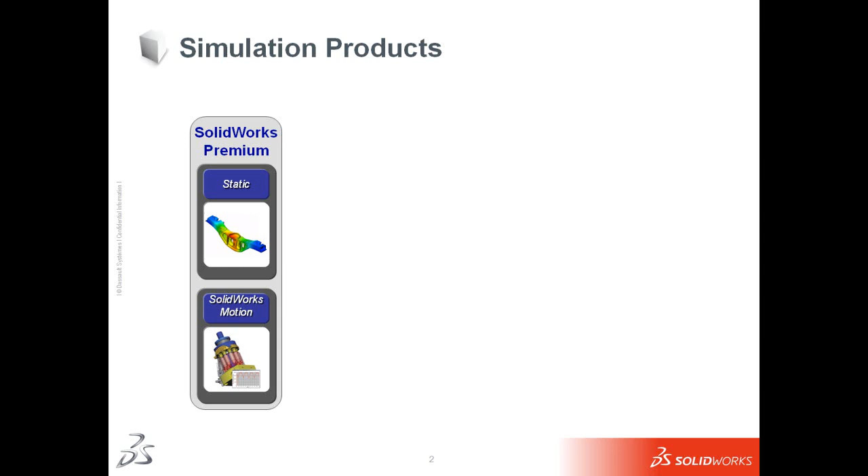If we take a look at what SOLIDWORKS Premium holds, basically it has the whole SOLIDWORKS lineup, including SOLIDWORKS Professional, which includes Toolbox and PDMWorks, and all the other SOLIDWORKS add-ins. But SOLIDWORKS Premium has something special: it has static analysis and SOLIDWORKS Motion, so two simulation packages.

When we move up a level, we get into Simulation Professional, and Simulation Professional offers a much wider variety of analyses that you can do. Everything from frequency, optimization, drop test, fatigue, and thermal and pressure vessel studies. So we'll get into some of those demos in a minute.

The highest level of simulation that we offer is Simulation Premium. That includes everything in SOLIDWORKS Premium, static analysis, etc., everything in Professional, as well as nonlinear studies, composites, and advanced dynamics. Today, because we are on a time schedule, we're only going to be covering these topics: static analysis, frequency, fatigue, thermal, drop test, and a quick nonlinear study.

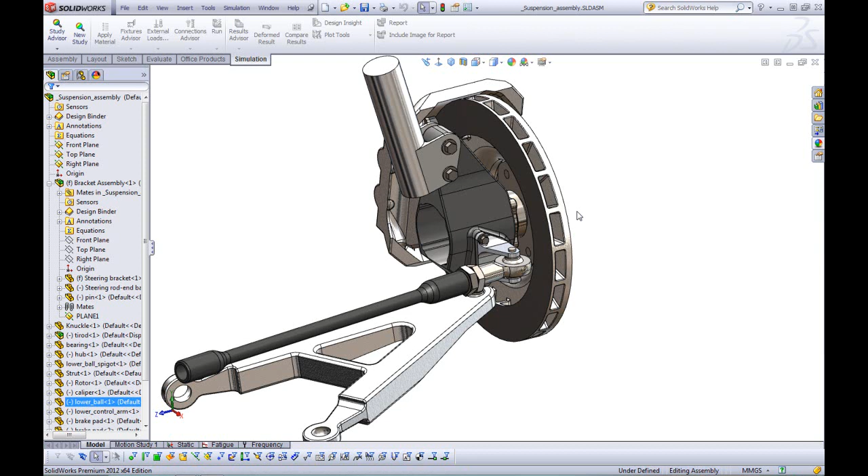So let's get started with the demonstration. I'm going to hop over to SOLIDWORKS here, and we have a suspension assembly for a rally car here. And what we're going to focus on is going to be this bracket right here, this steering bracket.

We want this to sustain. Actually, let me hop back over to the PowerPoint and talk about our goals for this study. So we're going to do a design validation for this bracket. We want to make sure we keep the stress below 150 megapascals.

We're going to design it, and we're going to do a fatigue study on it, so we want to make sure that it lasts an entire season of about 10 to 20 rallies. We're going to load it and unload it 1 million times using a fatigue study again. And we're also going to do a frequency study because we want to avoid frequencies in the range of 1 to 30 hertz, because typically the wheel motion generates about 27 or 30 hertz, so we want to make sure we stay out of that frequency range so that we don't hit any resonance.

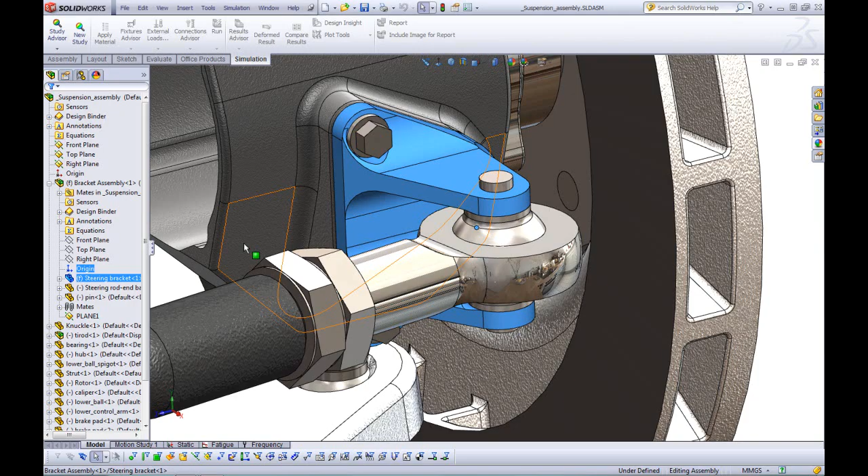Okay, so we'll jump back into SOLIDWORKS, and using configurations here, I basically just turned off all the rest of the components so we can focus just on this component. So let's go ahead and start a new study.

If you have Simulation Professional, you will see all these study types. Depending on what package of simulation you have, it's going to give you a different amount of icons here. If you have only SOLIDWORKS Premium, you will only see static here. To turn on simulation, before I get ahead of myself, you just go to Tools, Add-ins, and make sure that SOLIDWORKS Simulation is turned on. SOLIDWORKS Motion is a separate add-in, and that is included with SOLIDWORKS Premium, remember.

Alright, so let's go ahead and start a new study, and we're going to create a static study and say OK. For those of you unfamiliar with how to set up simulation analyses, we do have other webinars on our website, as well as the tutorials in SOLIDWORKS to go through and teach you how to set up analyses.

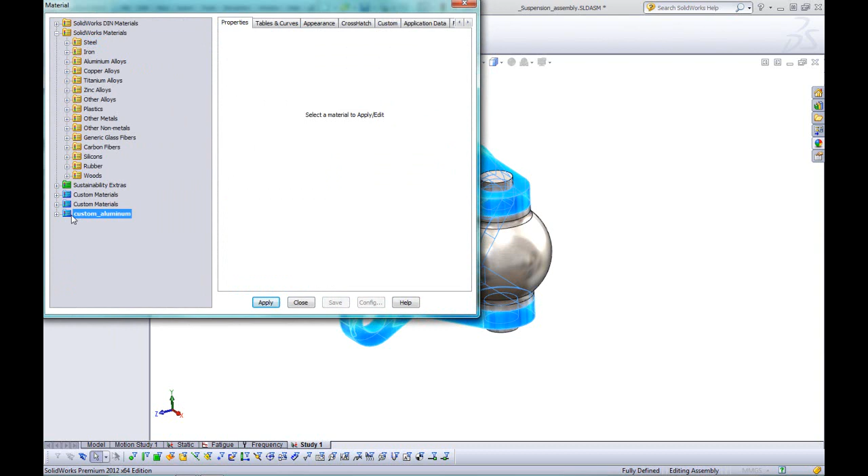So really quick here, I'm just going to add a material to this bracket, and it's going to end up being a custom aluminum material. Remember, the SOLIDWORKS and simulation material databases are fully customizable, so you can go in there and create your own materials.

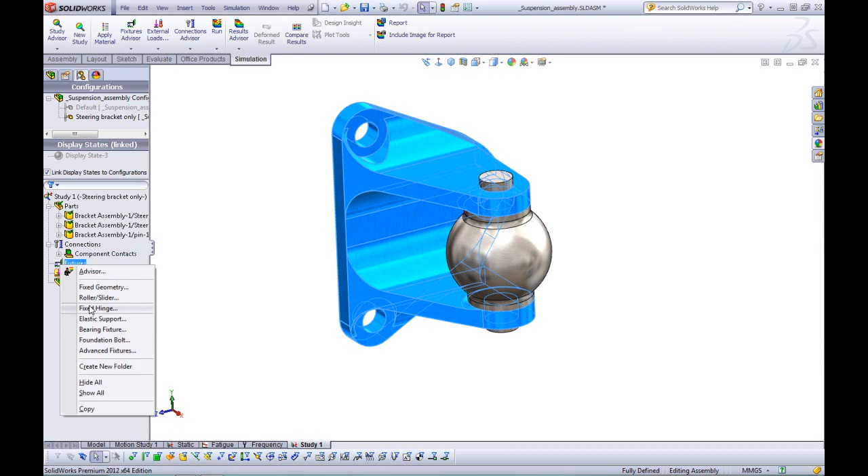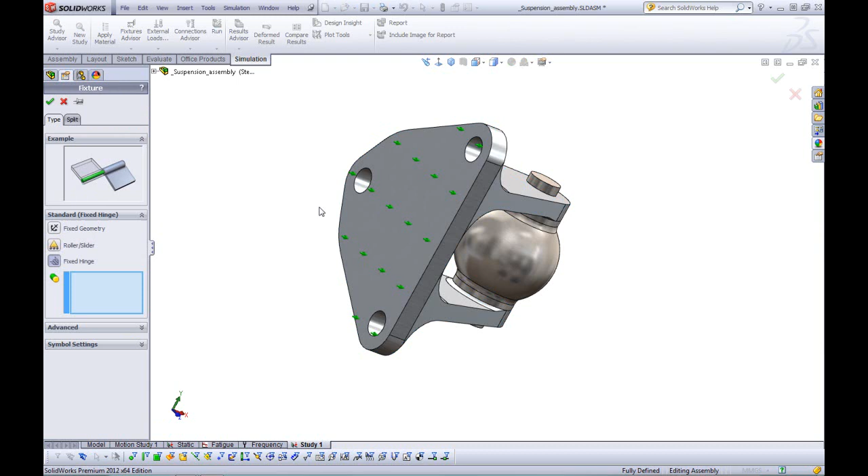For fixtures, we're going to go ahead and do a roller slider on this back face. So basically what it allows this back face to do is move parallel to this face, because in reality it's not welded to the plate that it's on. It just slides there, and it's only connected with the bolts. My next fixture that I'm going to do is called a fixed hinge, which basically simulates the bolts in these three holes. Okay, that's it for fixtures that I'm going to do.

The next thing that I'm going to do is I'm going to add a load, a force load, onto this face. I don't want it to be normal, so I'm going to click selected direction, and I'm actually going to pick this face for my direction, and I'm going to add 6,000 newtons in this direction.

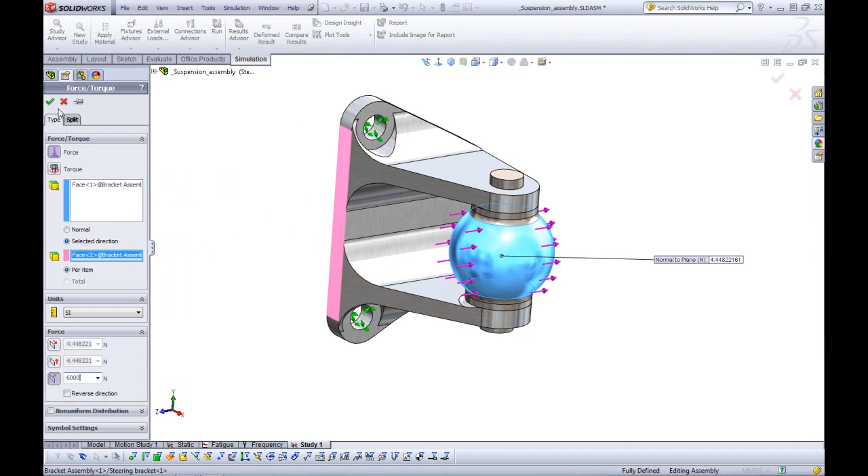And that's pretty much it for the setup. We can go ahead and run this static analysis, and again, the static analysis is included in SOLIDWORKS Premium, and we can see here the reaction of our bracket with that force.

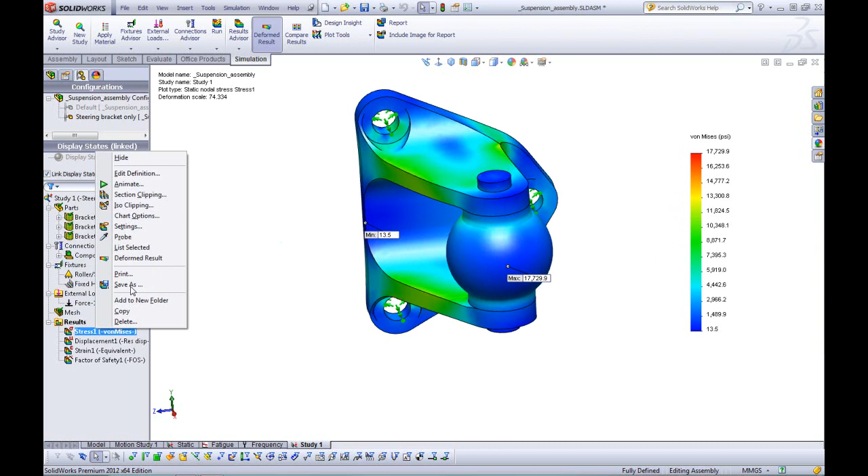I'm just going to hide this force so it stays out of our way, and I can animate any plot that I have very easily, so I can see what it's doing, and it is behaving as expected, right?

I can see here that my max stress is in these areas, which is to be expected, and we're at 17,000 psi. Now again, just like with SOLIDWORKS, it's very easy to change all my units in simulation. I can just right-click, edit definition on the plot, and change it to megapascals.

Remember, if I go back to my PowerPoint, we're looking for a max of under 150. And we can see here that we're actually at 122, so we're good for our static study.

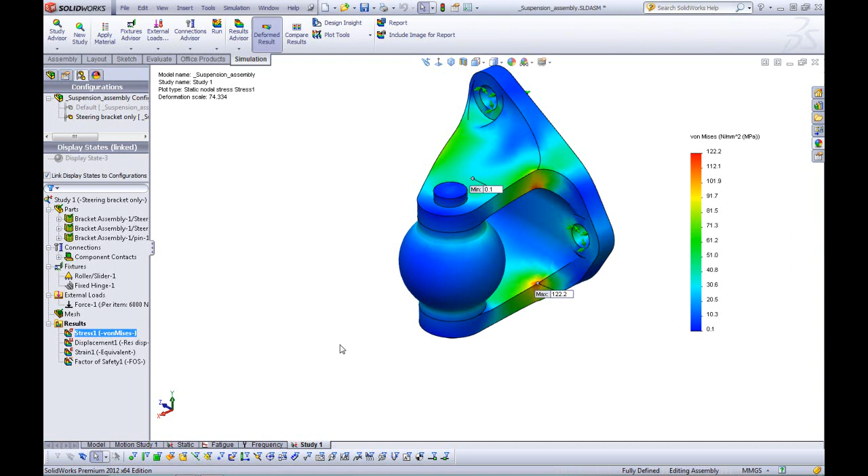If I want to take a look at any displacements, I can certainly do that. So we can see here that the max displacement at this ball is about 0.1 millimeters, which is acceptable for our needs.

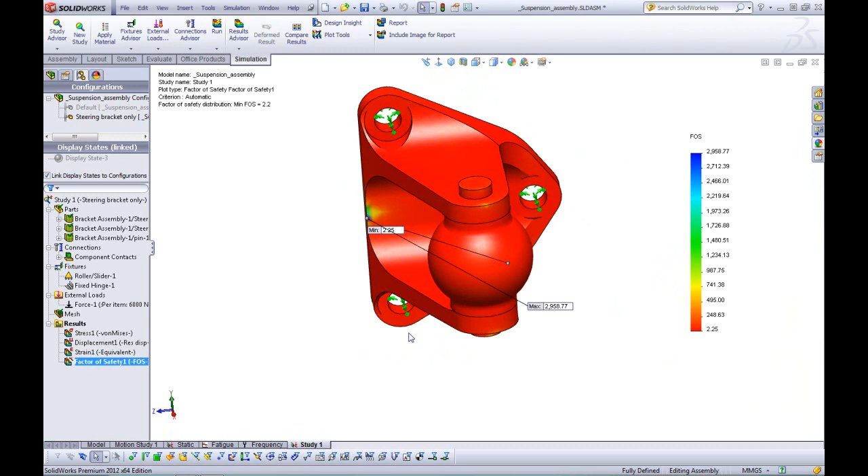You can also look at factor of safety. You can see that our minimum factor of safety is in this area again, and it is 2.25.

I'm just going to go ahead and adjust the scale here because our maximum factor of safety is almost 3,000. If I adjust from 2 to 100, we can see a better color distribution in here.

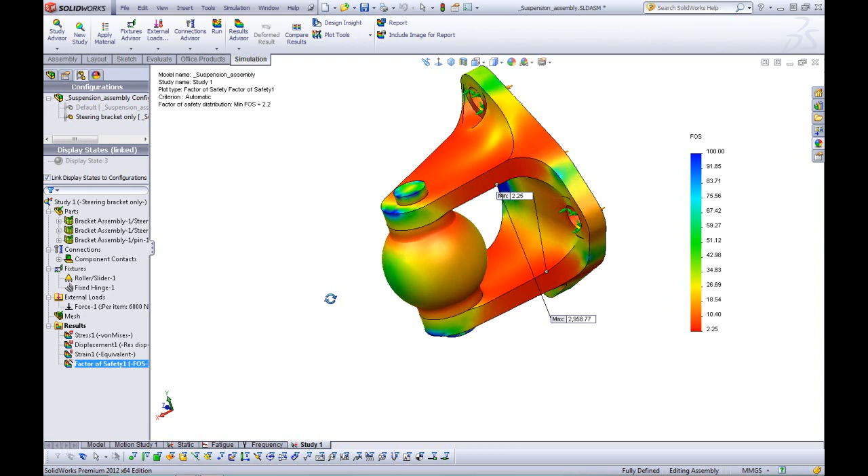Okay, so that's our static study, and again, that is what is included in SOLIDWORKS Premium.

We can do static studies just like that. We can add forces, pressures, you can even add thermal loads, which I'll show you later on. But typically that's what you would do in a static study.

Let's move on to the next study that we're going to do. We're going to do a study for our fatigue analysis.

So we'll jump back into SOLIDWORKS, and using this study, we're actually going to say, okay, now load and unload this 1,000,000 times. So I'm going to click on New Study and go down to Fatigue. Now this is included in Simulation Professional.

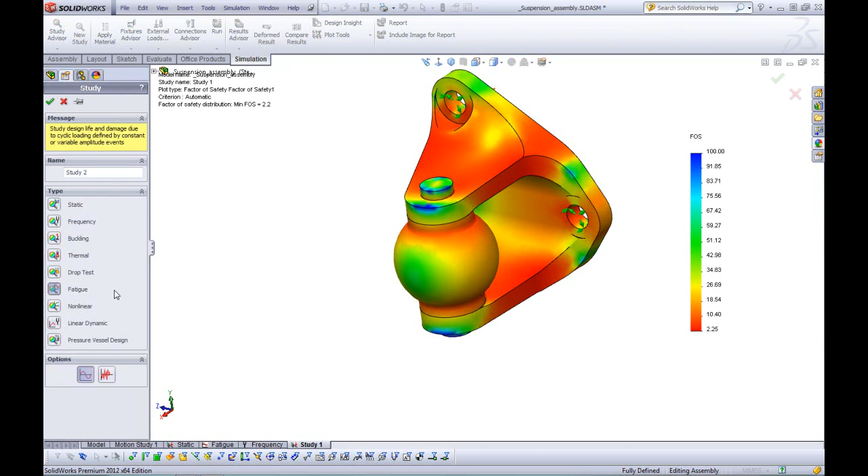And to set up a fatigue study, what you can do is you just right-click the loading, add event, and you attach it to any other studies that you have. So I have study 1, which was the one that I just created, and we're going to go to 1,000,000 cycles.

Fully reversed means that it's going to load it and then load it in the other direction, which is what's actually happening in this particular assembly, right? As it's hitting bumps and as it's turning, as you're turning the steering wheel, it's going back and forth, so it's loading and unloading.

All right, if we go into our result options, we want to make sure that we look at the whole model, and finally we want to make sure that all of our materials get added.

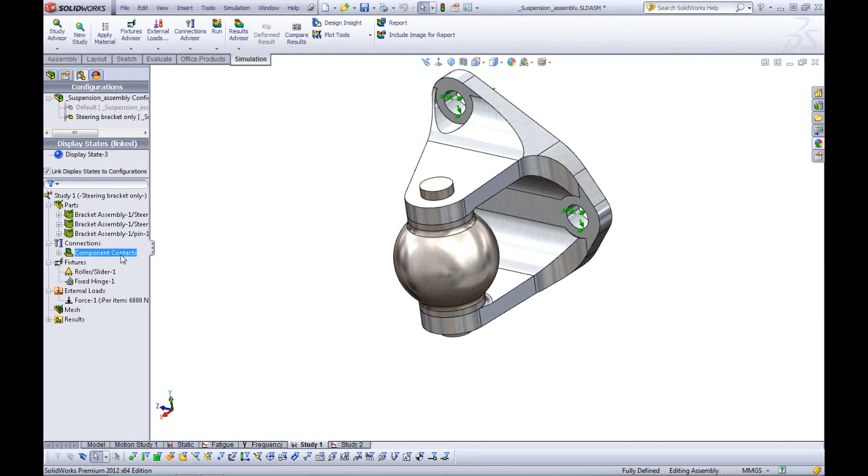A beauty of SOLIDWORKS simulation is you can actually copy and paste your materials from one component to another. So if I go ahead and copy, I can paste that material to all my components.

So let's go ahead, and now that I have green check marks on everything, I can go ahead and run this. It runs very quickly, and I have my results.

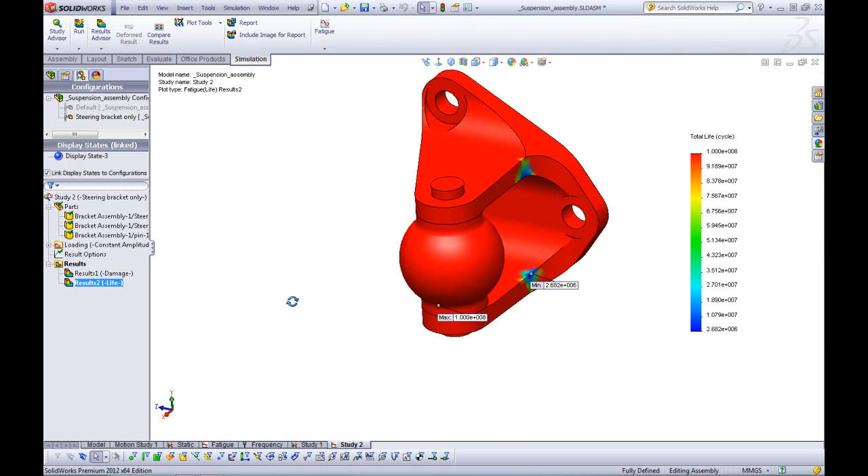I have two plots for my fatigue study. One is damage and one is life. If I double click the life plot, we can see that this is where we expect it to fail first, right? Because that's where the most stress was.

And we can see here that our minimum life is about 2 million, which basically means that this would fail at about 2 million cycles, where we're at 1 million cycles now. And in here we're at 1e to the 8, that's our maximum.

We're okay here. If I go to damage, here we can see that the damage is about, and it's in a percentage, so it's at about 37%. So we're at about 37% of the wear and tear that this joint is going to take at this location.

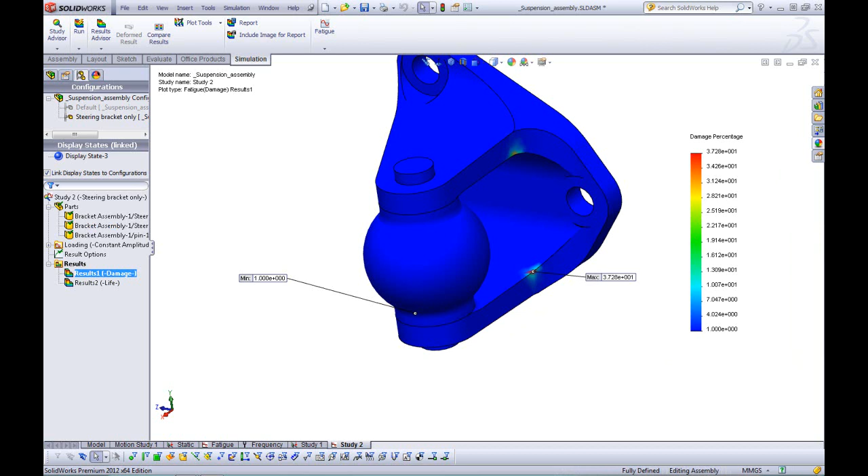Okay, so we're nowhere near 100% damage, and we're nowhere near using up all of the life of this component. So we now meet our second requirement.

Let's jump into the third requirement, which is the frequency check. We want to check the natural frequencies of this component.

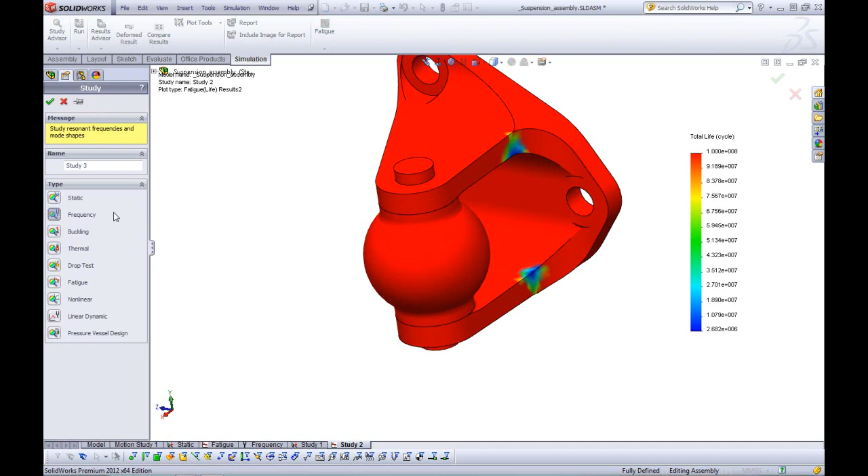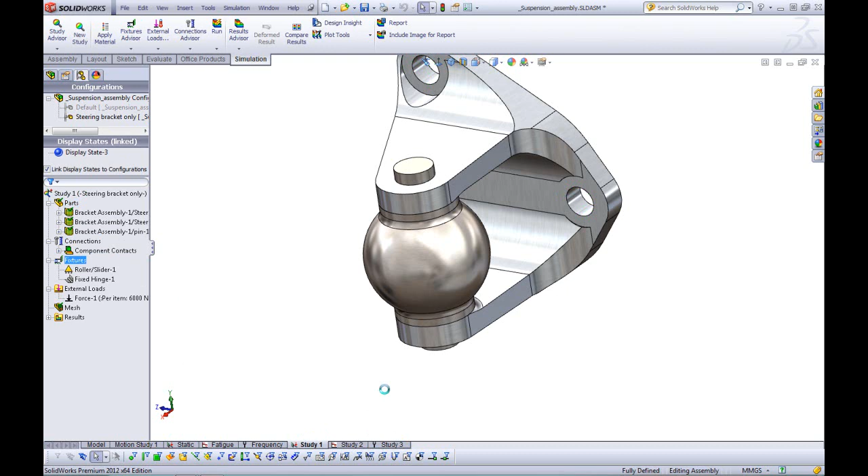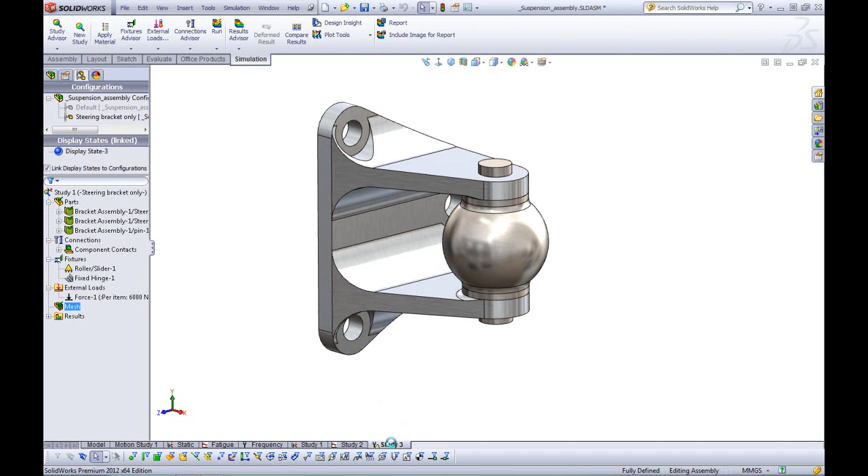So let's go ahead and create another new study, and we're going to create a frequency study where, again, I can copy and paste or drag and drop the materials from there to there. So from study 1, I can drag and drop the materials, and I can drag and drop the fixtures as well, because that is going to change our natural frequencies. I'm not going to add any external loads because I don't want to add loads to study the frequency of this. I certainly could, but I'm not going to. You can even, if the geometry doesn't change, drag and drop the mesh, which is the mathematical model that simulation creates, which again is going to save time in our study.

So I'm going to go ahead and run this. Again, this runs very quickly. And we can see our first 5 modal shapes.

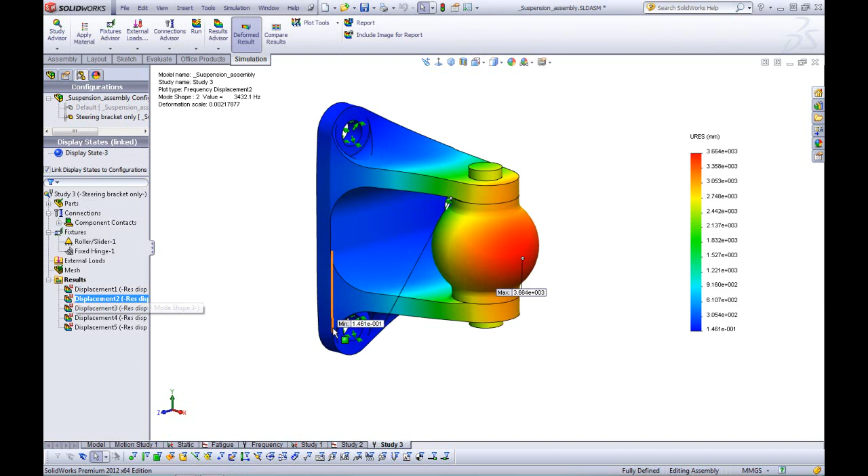If I just double click on these, you can see that. Looks like this one is the first twisting mode. I can right click and animate here so you can see what it's actually doing with this modal shape. You can see that's at roughly 7,000 hertz.

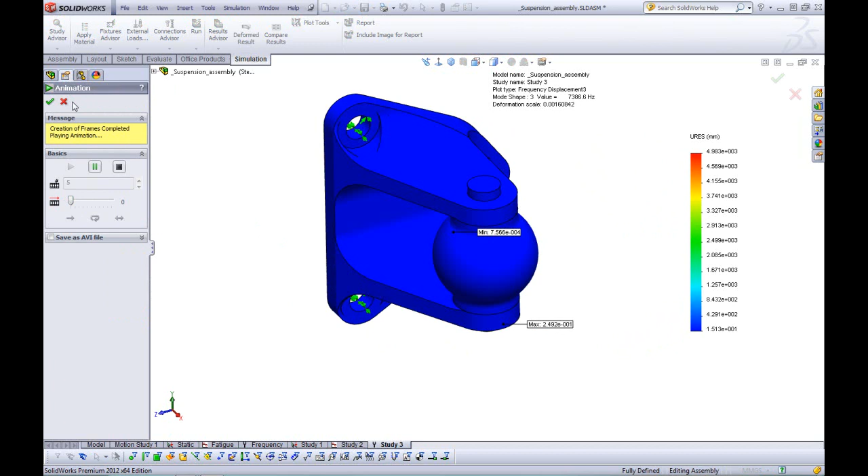If I want to see all the mode shapes that I solved for, I can right click the results folder and say list resonant frequencies. So it's solved for 5 modes, and you can see here we're nowhere near our 30 hertz. So we're good to go for this.

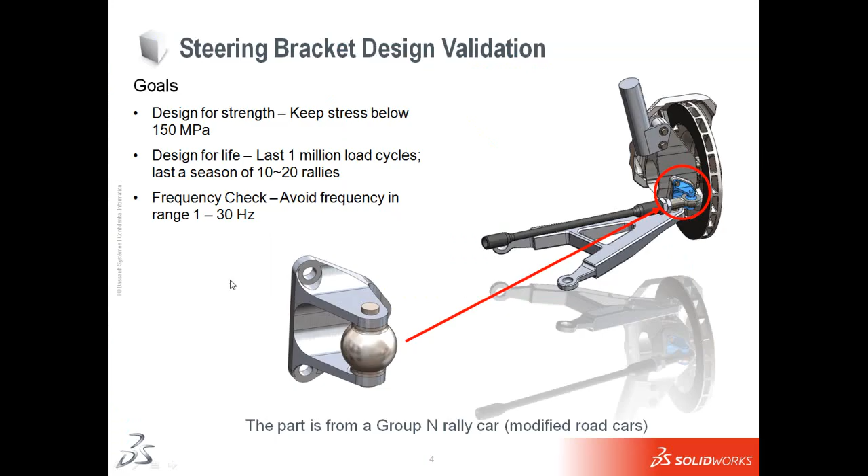Okay, so that's a quick overview of these 3 analyses. We did the static, where we just loaded it. We did a frequency just now, and we also did a fatigue where we loaded and then unloaded using the static study. So we already jumped into Simulation Professional with these 2 studies.

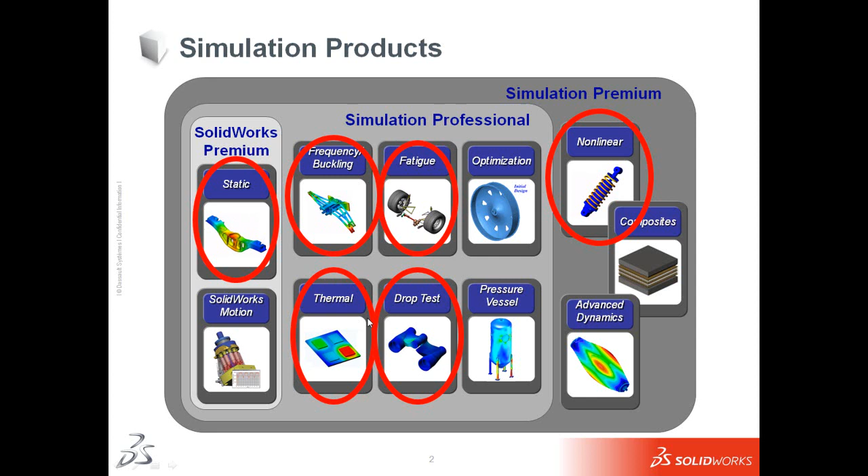The next thing we're going to do is we're going to do a thermal study on a spark plug. Our goal for this study is to determine the stress distribution caused by the actual spark. Rather than generating a spark in simulation, we're just going to heat this area up to 1,000 degrees and see what happens.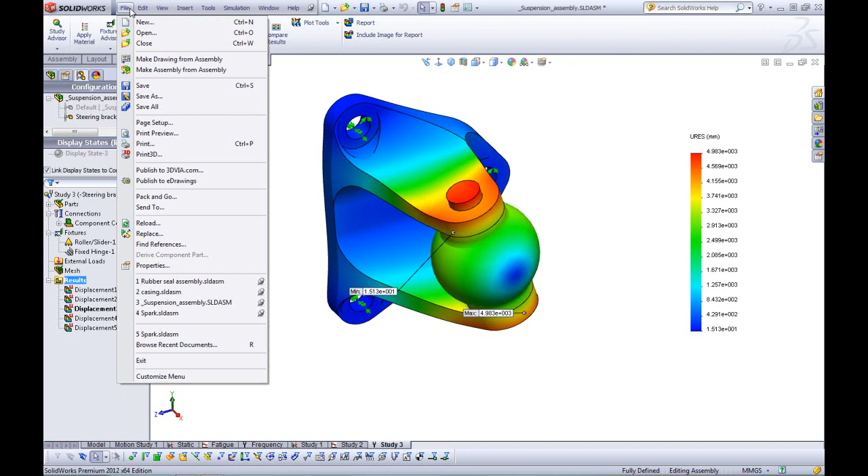So let me open up this assembly, and let's take a look at how to set up a thermal study. Again, we just go to New Study and we pick Thermal from the list. I already have a thermal study set up. I'll just walk you through how to do it. It works exactly the same way as all of our other studies.

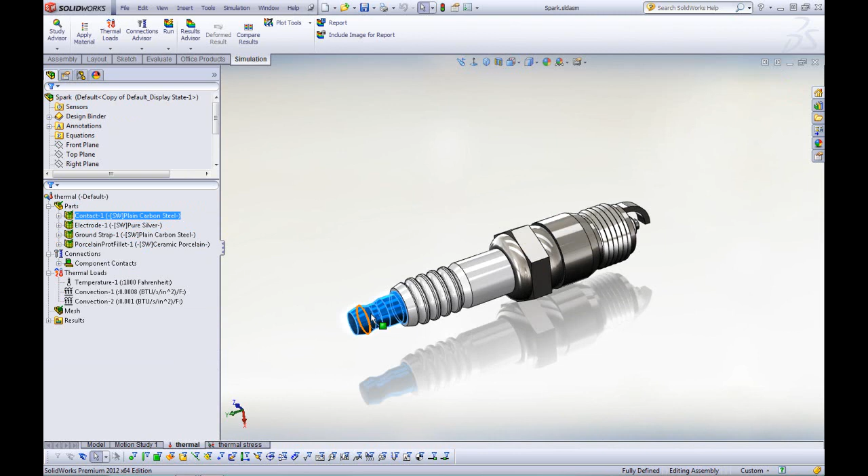So we define materials. I have plain carbon steel down here, silver at the node up here, plain carbon steel, and ceramic for the bottom. Obviously each one of these has different thermal properties.

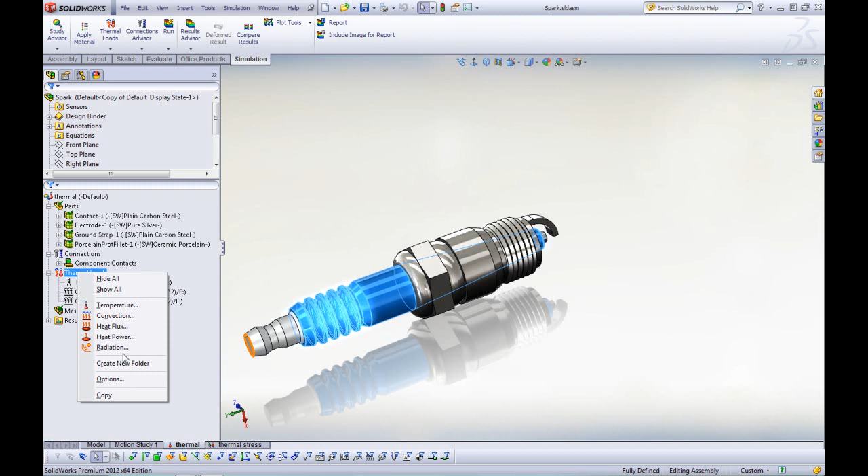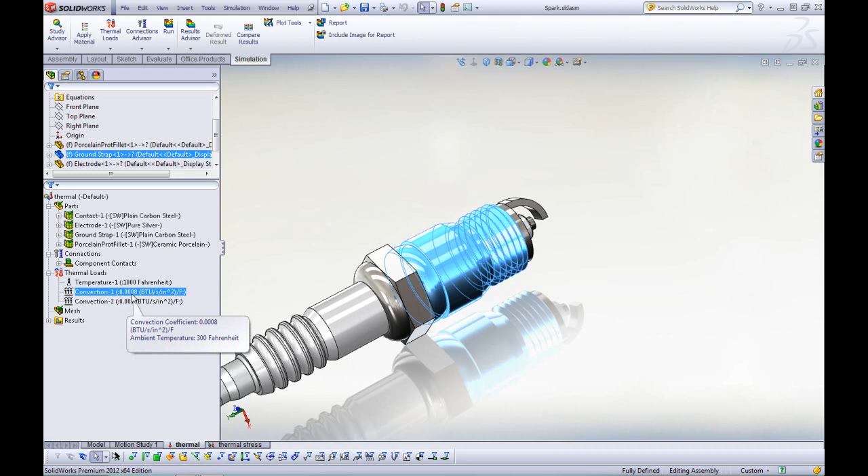I added a temperature load, so rather than force loads, we have thermal loads. You right click, and I can add temperature, convection, heat power, heat flux, and radiation. I added a temperature load to these internal faces of 1,000 degrees Fahrenheit. I also added convection coefficients because these are going to be convecting or conducting to, in this case, the engine block. So this is a convection coefficient of 0.0008 with an ambient temperature of the engine block being 300 degrees Fahrenheit. I also added a convection coefficient here, which is a little higher, 0.001, with an ambient temperature of 200 degrees Fahrenheit to the open air next to the engine block.

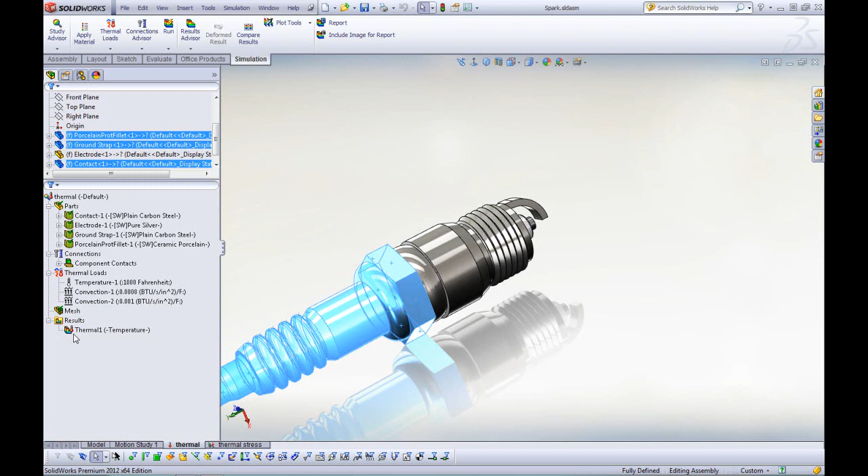We mesh it the same way, we run it the same way, and let's take a look at our results. So we have a temperature gradient plot where we can see, obviously where I added the temperature, it's at 1,000 degrees Fahrenheit, and out here in space, in the open air, it's about 200 degrees, which is what we set the ambient temperature at.

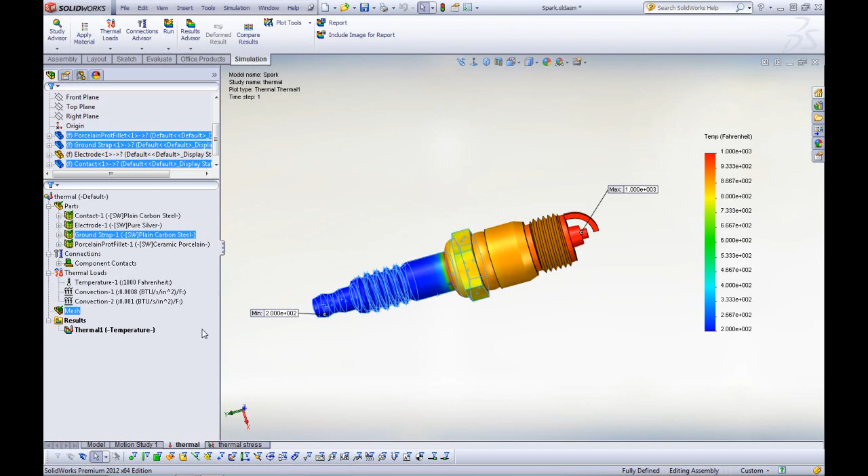I can right click this and do some section clipping, which basically cuts this in half so I can see the temperature gradient through my component.

Just like every other simulation, I can right click and probe, so I can actually take points and see the temperature distribution through this component, and I can also plot it on a graph. So I can see the temperature distribution through the thickness of my component here.

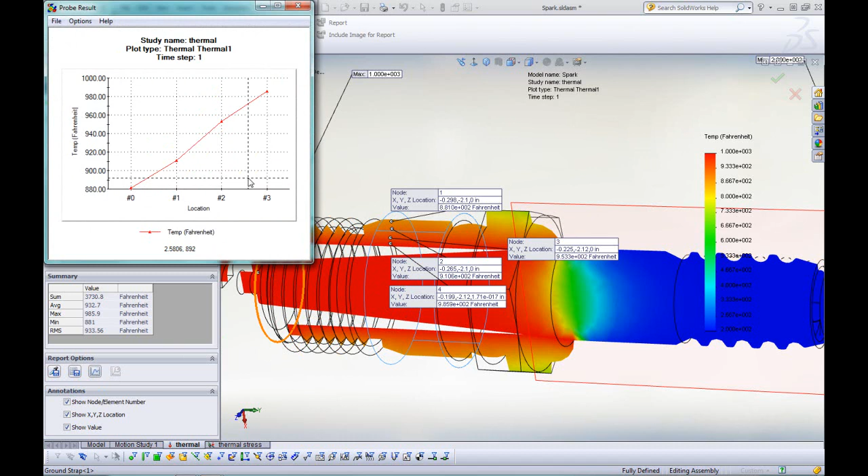You can also save that out to a comma separated file, a CSV file, that you can import into Excel.

The next thing we're going to do is take this thermal study, because all it does is plot temperature gradients, and import it into a static analysis, a stress analysis, so we can see what stresses are induced by our thermal loads.

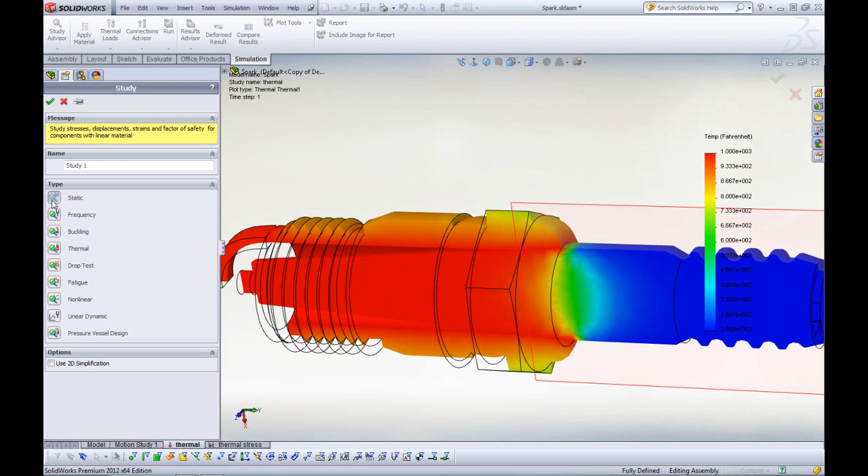To do that, again we go to New Study and do a static study. This time, for our external loads, I right-click and go to Thermal Effects, which brings me to this screen, and I can import temperatures from a thermal study.

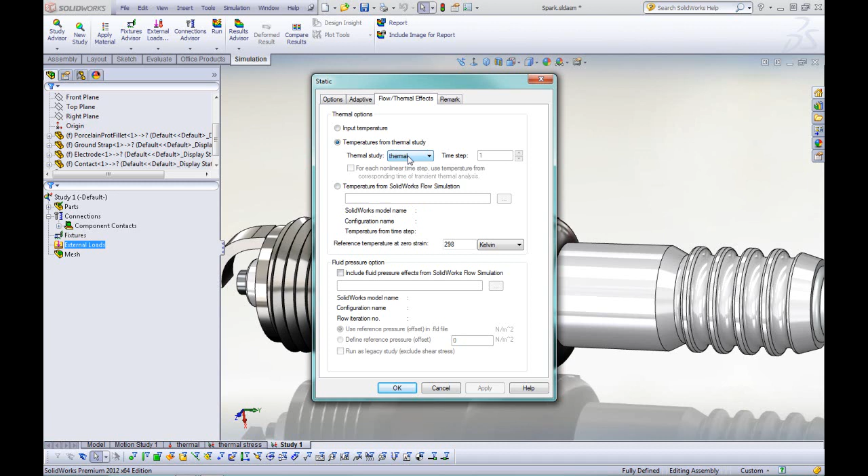I only have one thermal study in this case, which we were just looking at, but if I had multiple thermal studies, I could pick which one to import. What that does is add an external load that links it to this thermal study down here.

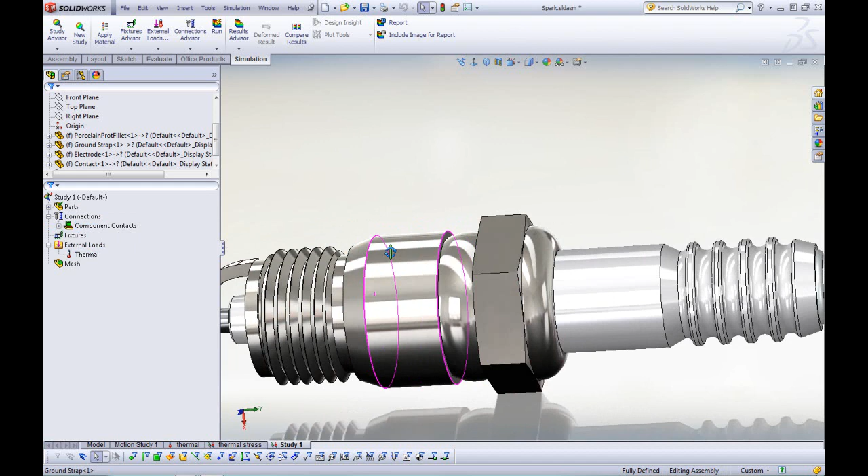Same idea, we can drag and drop materials and add any fixtures. In this case, because this is screwed into the engine block and there's a collar that goes around here, we're going to add a cylindrical face restraint on this face so that it cannot move axially or radially, or rotate either, because it's screwed into the engine block.

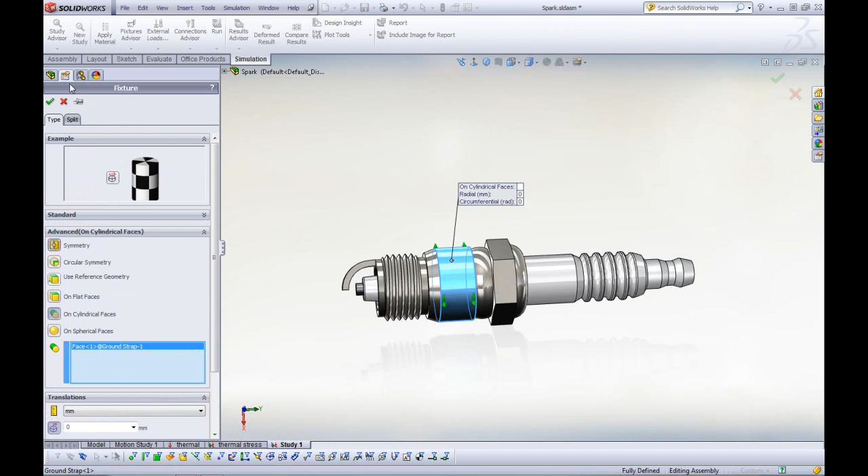Again, that takes a second to run, so I already have one created. Let's take a look at the stresses.

We can see here that the max stress is about 2.5 billion newtons per meter squared.

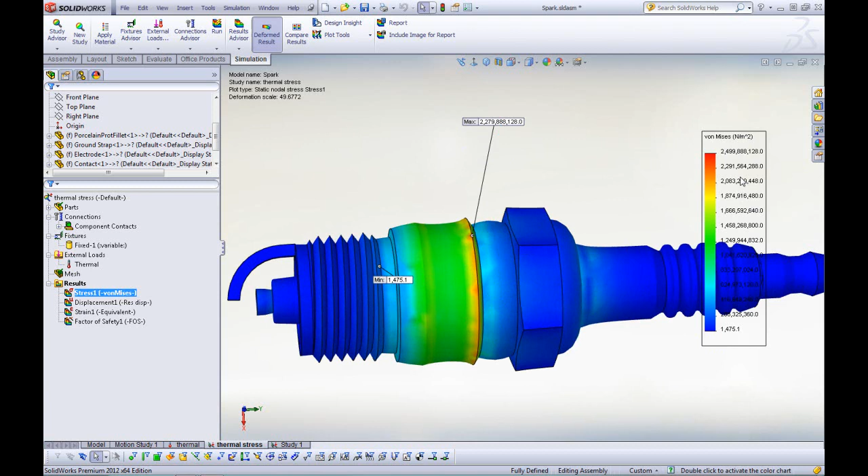We can also take a look at our displacements if we need to. Our expansion, we're looking at about 0.1 millimeters at this point, which is more than acceptable.

We can also look at factors of safety, and it looks like our minimum factor of safety is 0.1.

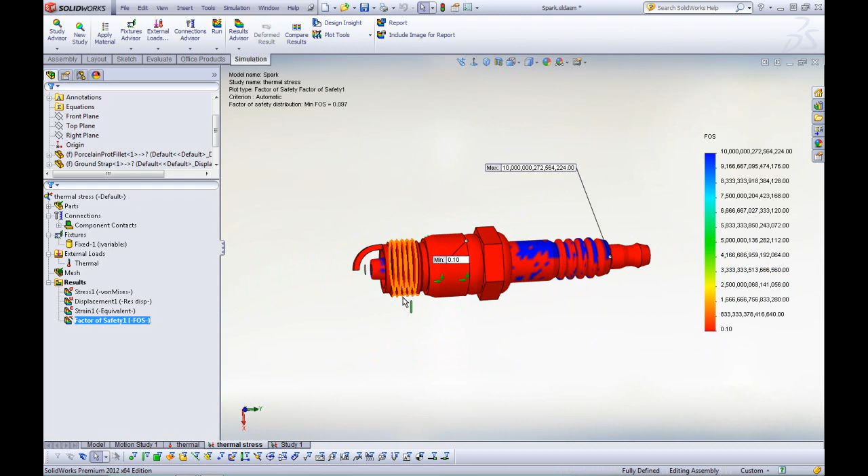We may actually be breaking this geometry, so I'd want to make sure that 1,000 degrees was accurate and that this entire thing was actually 1,000 degrees. So you're just going to want to be careful. This is going to give us some good insight into what's going to happen with our components.

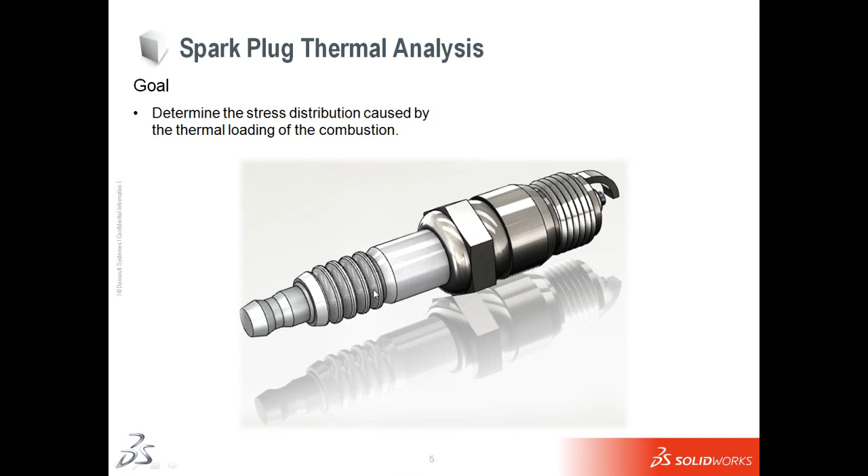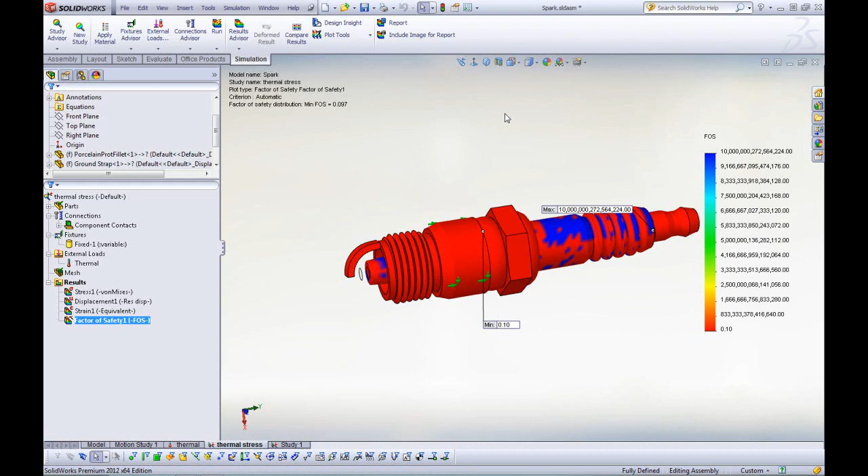Let's go back in here to SolidWorks and open up this phone assembly.

What I did was add a sensor. For those of you who don't know, you can add sensors in SolidWorks to monitor pretty much anything. You can monitor dimensions, mass, and you can also monitor simulation results.

You right-click the sensors folder and click Add Sensors, so mass properties, dimensions, interference detection, etc. We're going to do simulation data and workflow sensitive, which monitors all simulation data. Basically my sensor was monitoring this corner.

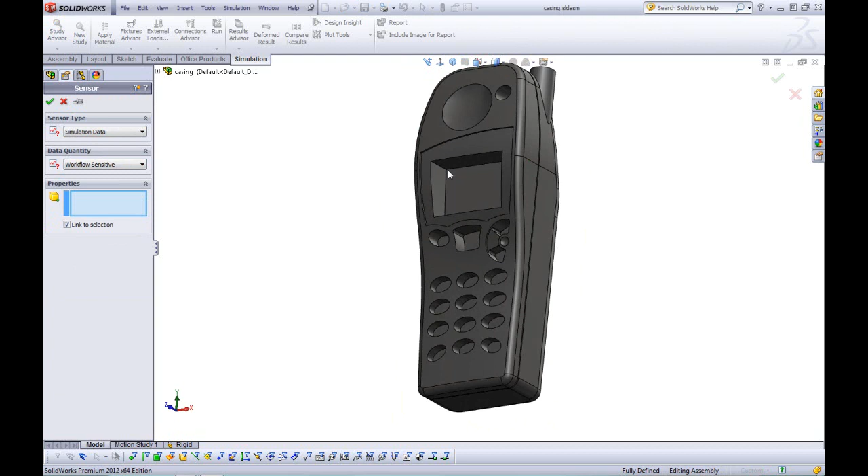So let's go ahead and set up the drop test. We click New Study and Drop Test. Setup for a drop test is very, very easy.

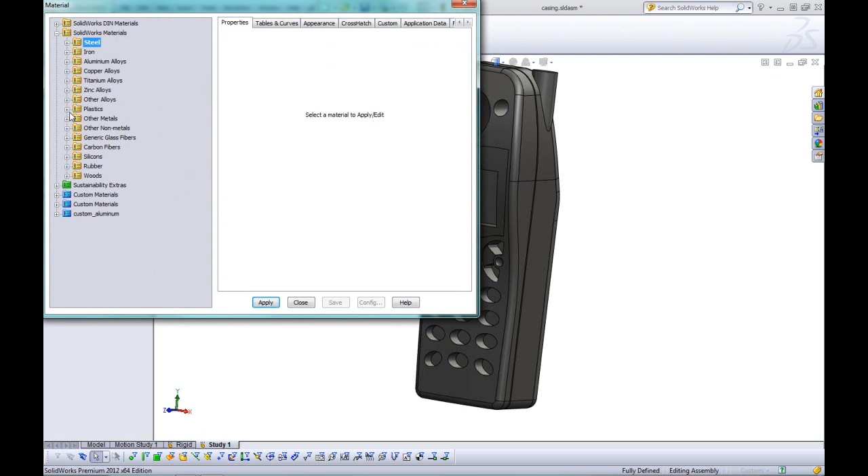All you do is apply the materials, obviously. I'm just going to apply a material to all of these, and we'll make this out of medium high impact acrylic.

And we right-click the setup where we define either the drop height or the velocity at impact. So I can fire this at the floor if I want to, or I can drop it from, in my case, the lowest point. I want it to be 6 feet off the ground. I give it a direction for gravity.

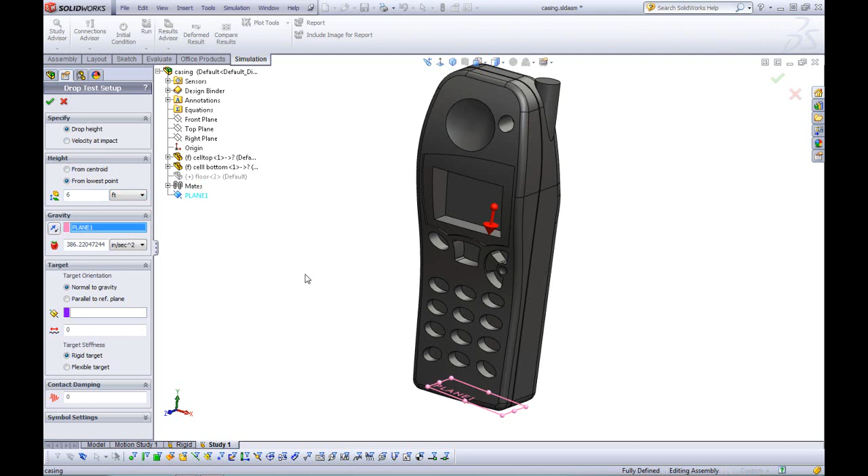In this case I have a plane that's askew a little bit, so it's going to hit on this corner. If I wanted to change the target orientation, so if I wanted it to accelerate in this direction but hit in a different direction, I could choose a different plane here. But in this case, we're just going to pick normal to gravity.

I could also supply a friction coefficient to the target, or the ground in this case, and specify whether it's a rigid or flexible target. We want worst case scenario, so I'm going to keep this on rigid. I can also apply a critical damping ratio, so it'll dampen as it hits, or as the stress propagates through. We're going to leave that at 0 for right now.

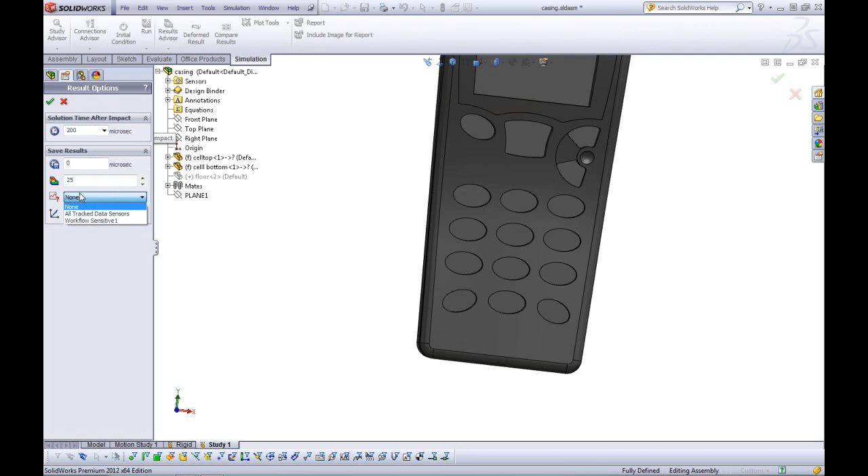And we right-click Result Options, go to Define Edit, and what we're going to do is monitor how long after impact. In this case, I'm going to do 200 microseconds after impact, and we want to save results starting from 0, number of plots 25. And this is where we monitor our sensor.

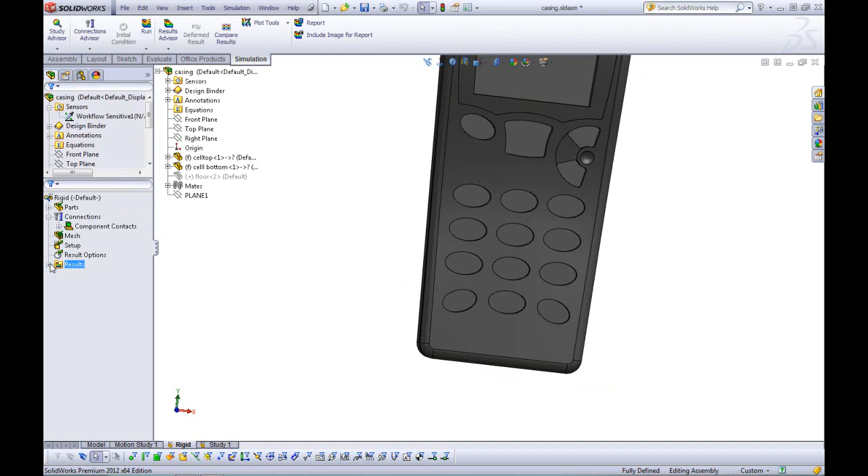Okay, we run this. Now this does take quite a long time to run because it's doing it in loops. So what I do is I already have this drop test run, and in the results we get the same results.

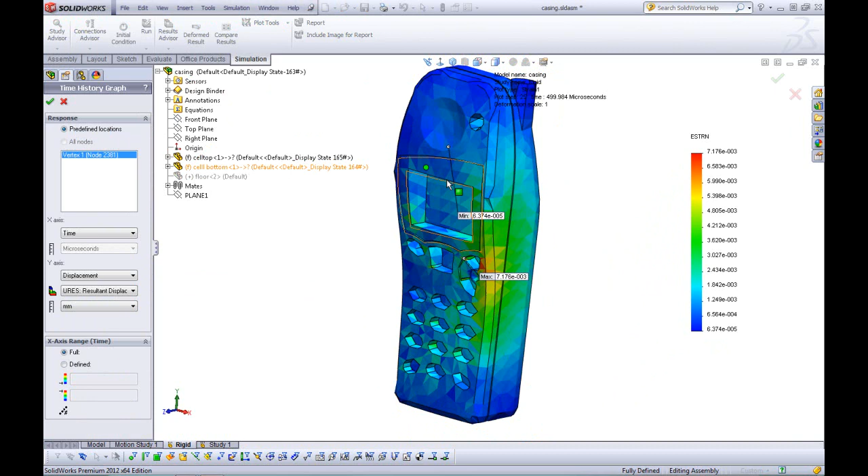So we see our stress distribution. Here we can see I created a very coarse mesh just for speed's sake. Our displacements, strains, and our response graph. This response graph is monitoring that vertex that we specified, showing the displacement of this point over time.

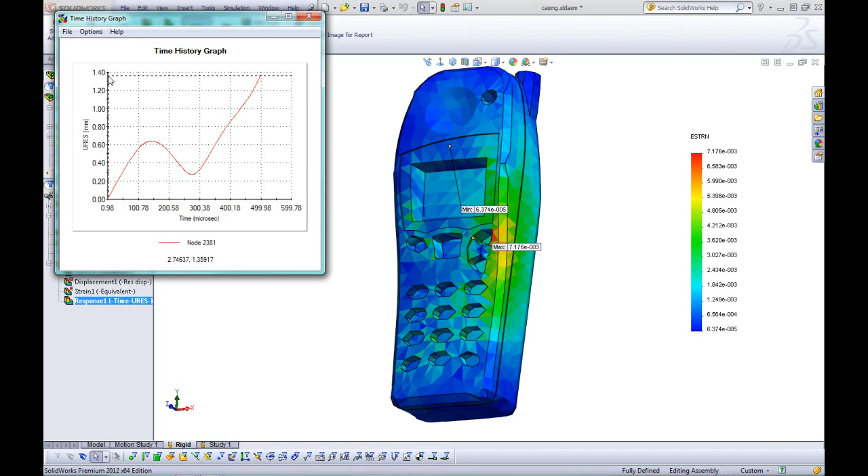And now for the fun stuff. This is what everyone wants to see, right? We want to see this thing actually dropping. So I go to my stress plot, I right-click Animate that, and we can see it dropping, and we can see the stress propagating through.

I'm going to change my resolution here real quick just so it slows down a little bit more. Okay, so you can actually see the stresses propagating through the component. And this is up to 500 microseconds after impact. Again, I would probably want to do at least double this just to see exactly what's going to happen.

Okay, we can see here that if I look to the right on my stress plot, we are past yield at some points, and we can see that the red is down here. So we can actually follow the max stress — it's always down here. So this is actually breaking. The acrylic is actually breaking. So from 6 feet, this thing does in fact break.

Okay, so back to the PowerPoint. So we see the stresses when dropped from 6 feet, and we determine that the screen will break due to deflection in this area. It is very likely that the screen does crack.

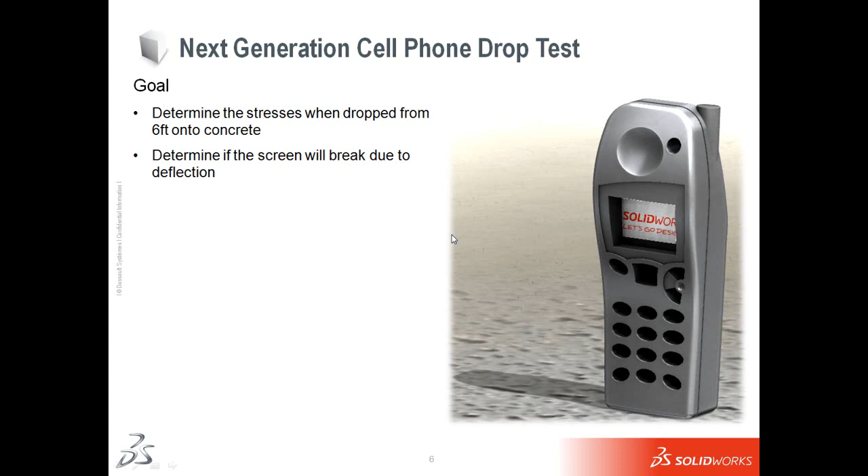The profile is just an extruded profile, and this could be as long as you want. We're going to take advantage of symmetry to show what's actually going on in the gasket here. And we're also going to load it and unload it.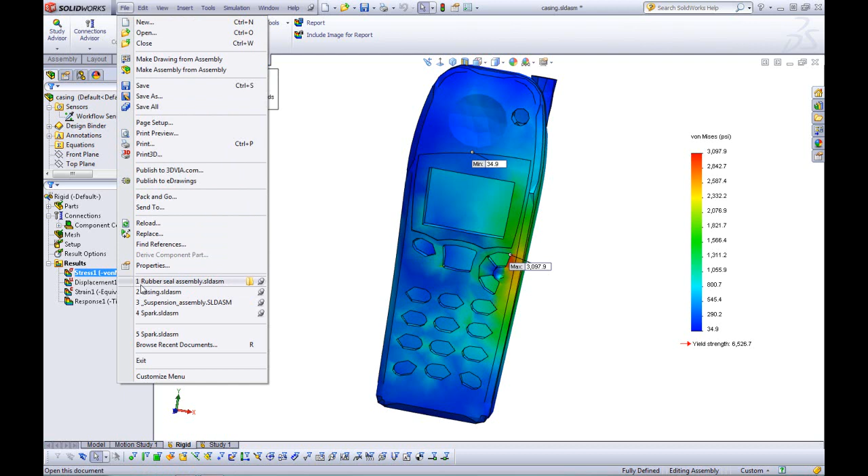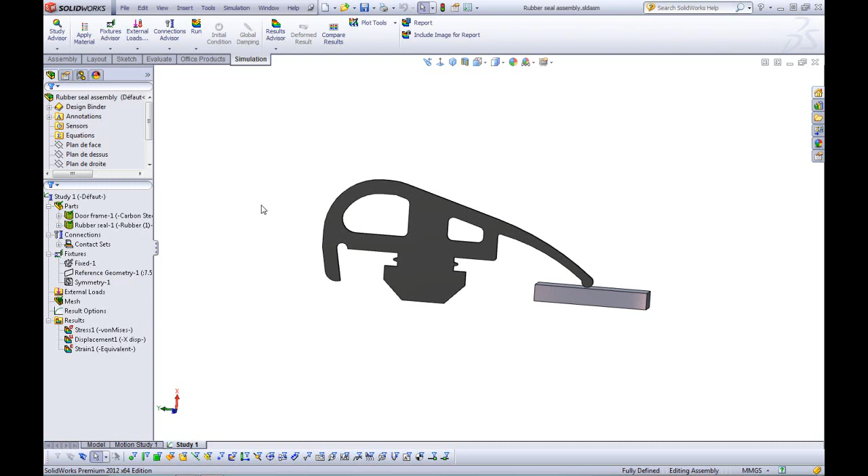To do that, again, we have materials. We follow the same process over and over again. The material, let's take a look at that real quick. It's a rubber material. In our nonlinear analyses, or in our nonlinear package, we have our linear elastic isotropic material, which is the default, but we also have nonlinear elastic, some plasticity models, 3 in fact, the von Mises, Tresca, and Drucker-Prager. We also have hyperelastic material models, viscoelastic, and Nitinol models. For more information on that, give us a call, and I'll be more than happy to discuss those further. But in the interest of time, we're just going to keep this as a Mooney-Rivlin material model.

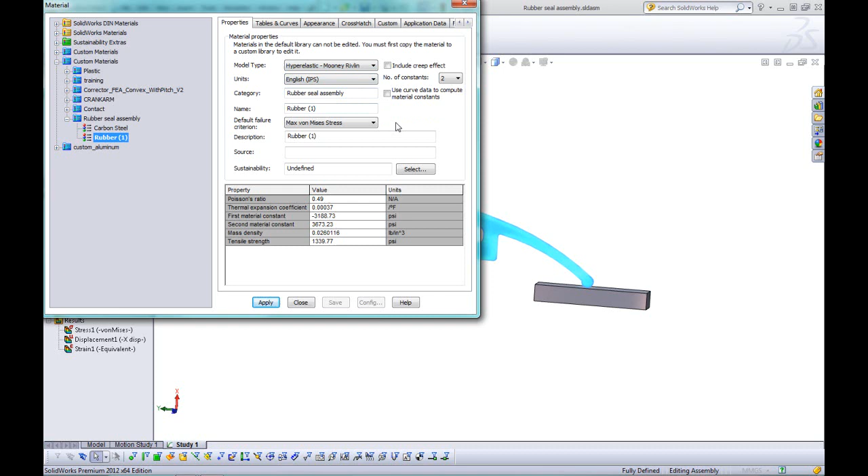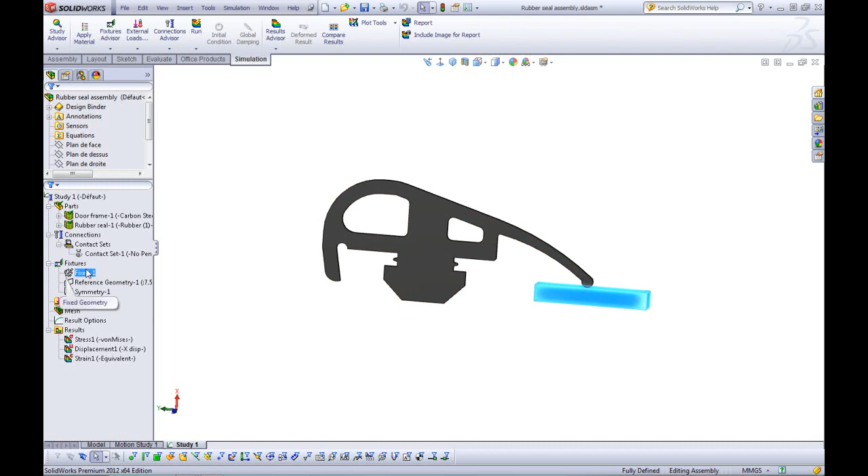The door frame is going to be carbon steel. It doesn't matter what it is, it's significantly harder than the rubber. That's all we need to know. For contact sets, we're going to apply what's called a no penetration, which means that at these two locations right here, the steel can slide along the rubber. As I mentioned, we fixed these edges in here as if it were bonded or glued to the door frame.

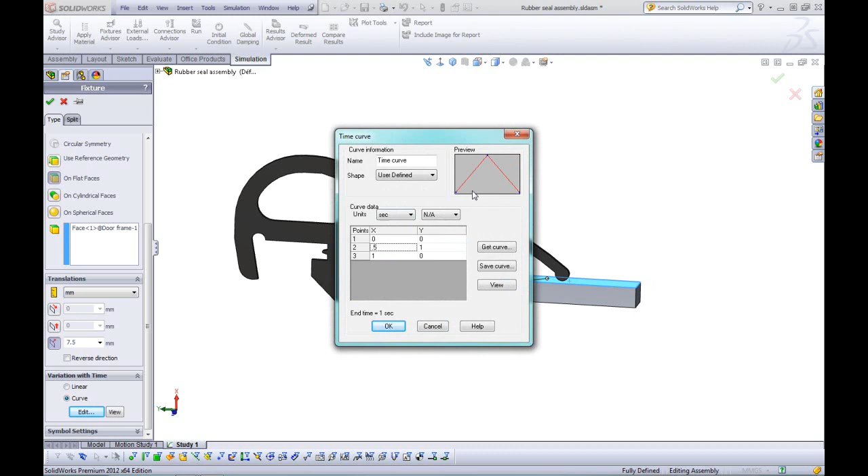We say OK, and run the analysis.

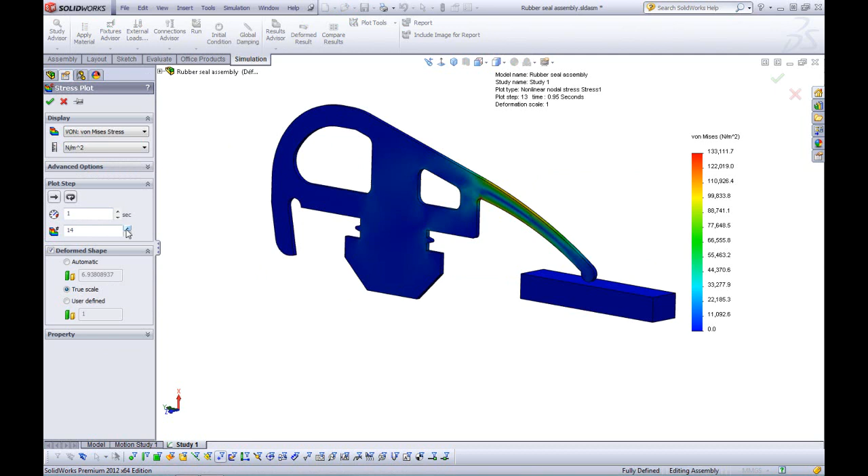So we can see the results in here. If I edit the stress plot, we can change which plot we're looking at. This is at 1 second, you can see it moved back down to here. I can also animate this so it cycles through the motion. Let's change this down to a higher resolution so it goes a little bit slower, and we can see exactly what it's doing.

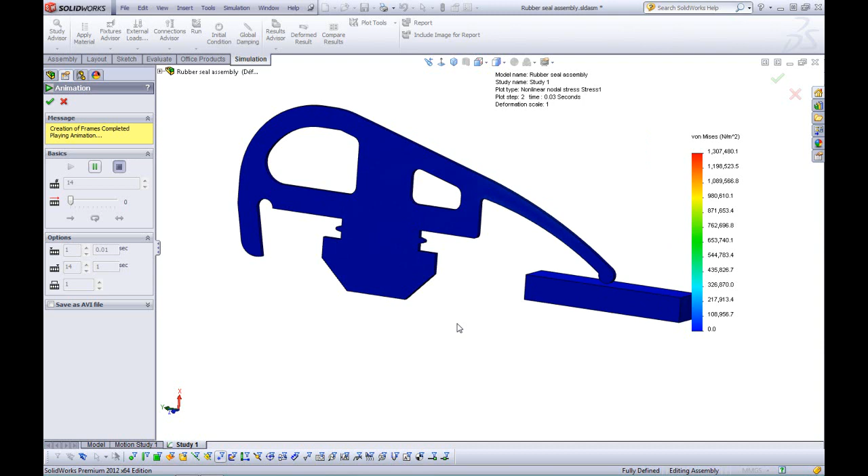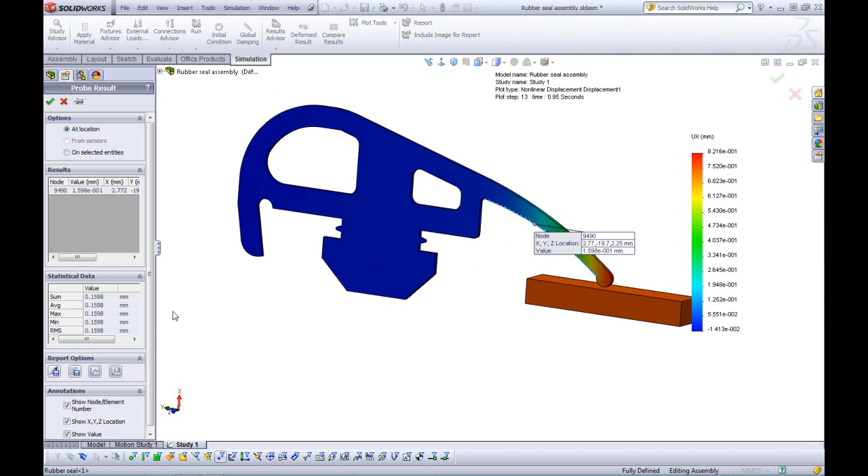We can also plot the deflection just as we did before. We can probe the displacement, for example, and show the displacement. We can probe this point and actually watch it over time, which it acts as we expect.